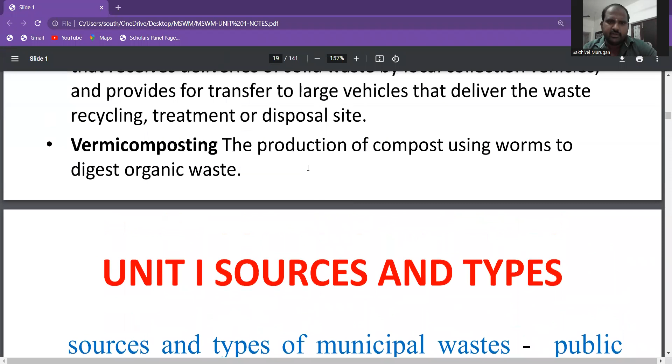So, we are going to see a topic in the subject of municipal solid waste management in the final subject. So, first of all, we are going to take a topic in unit one. That is called the sources and the types of solid waste. Okay. So, what are the sources and the types of municipal waste?

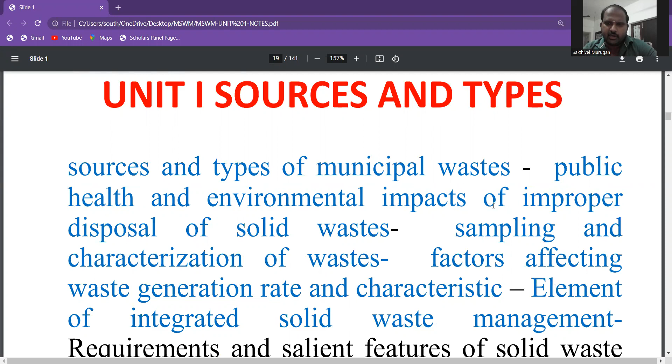So, first of all, sources and the types of municipal waste, and then public health and environmental impacts of improper disposal of solid waste. In that, a lot of sampling techniques and characterization of waste is there. Then factors affecting waste generation rate and characteristics. Next one is the elements of integrated solid waste management and what is integrated solid waste management.

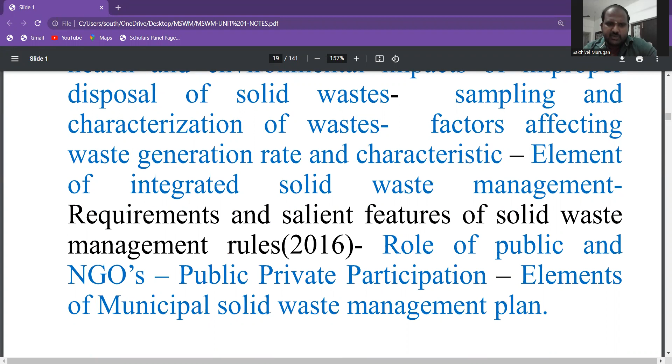We are going to see a topic of requirements and salient features of the solid waste management rules of 2016. Next one is the role of public and NGO, public private participation, elements of municipal solid waste management plan. So lot of topics in the first unit. One by one we are going to see about that.

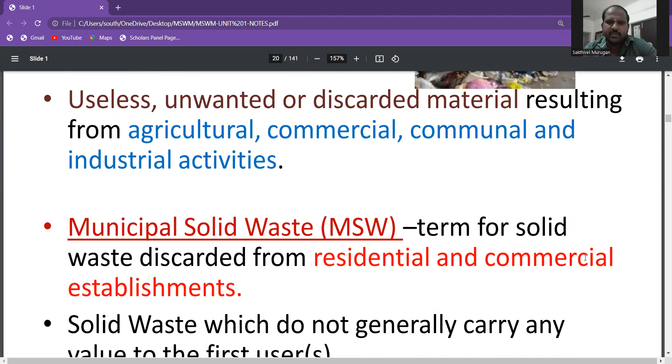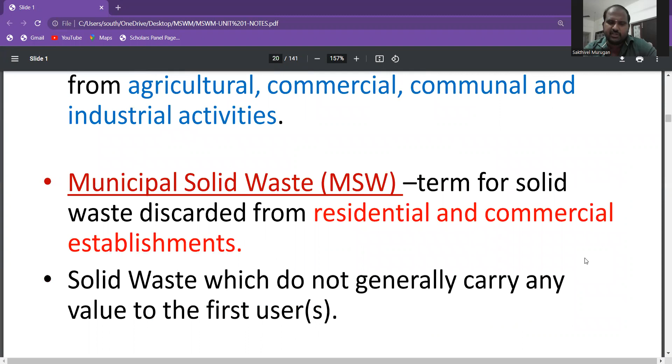So first of all, what is waste? Waste is a useless, unwanted, discarded material resulting from agricultural, commercial, communal and industrial activities. Next one is municipal solid waste, that is MSW, term for solid waste discarded from residential and commercial establishments. Solid waste does not generally carry any value to the first user.

So we are going to see a topic of classification of solid waste. What is the classification of solid waste? A lot of waste comes under the topic, which is classified into various types. Solid wastes are classified on the basis of source of generation and type. First, we are going to see source based classification. What is meant by source based classification?

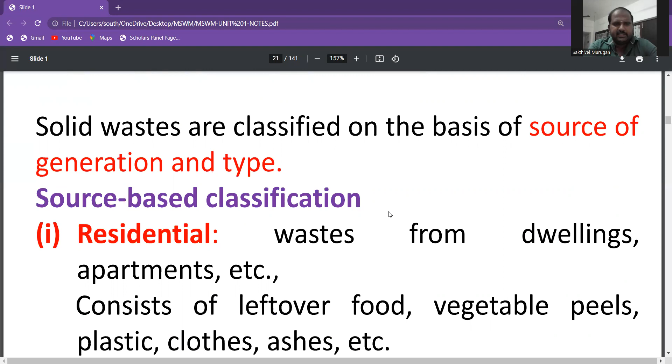Next one is commercial waste. Commercial waste consists of leftover food, glasses, metals, ashes, etc. It is generated from stores, restaurants, markets, hotels, motels, auto-repair shops, medical facilities, etc. So first one is residential. Next one is commercial.

The third one is institutional. What is institutional waste? This mainly consists of paper, plastic, glasses, etc., generated from educational, administrative, and public buildings such as schools, colleges, offices, prisons, etc.

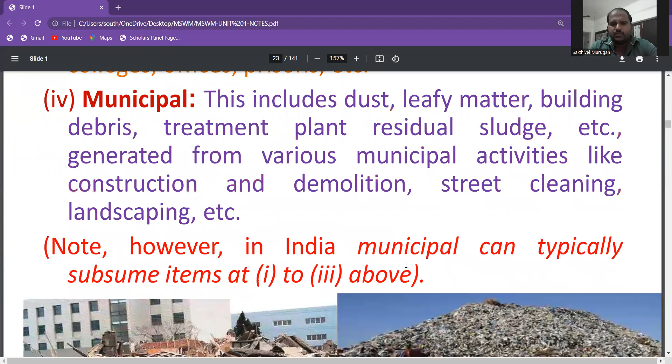The fourth one is municipal. This includes dust, leafy matter, building debris, treatment plant residual sludge, etc., generated from various municipal activities like construction and demolition, street cleaning, landscaping, etc. These are some pictures of municipal waste.

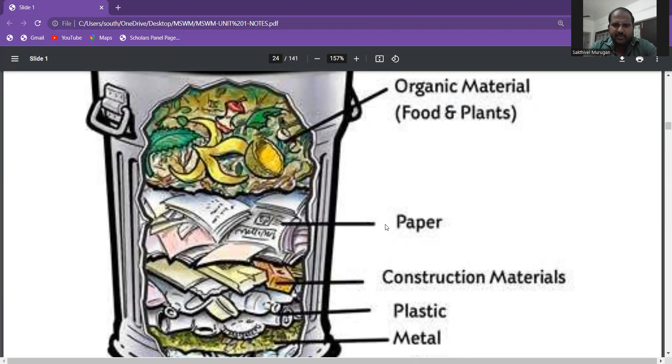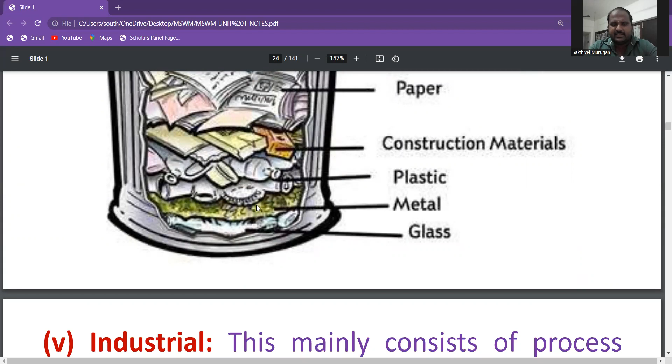Next, what does this diagram consist of? It is about composting of wastes. First, organic material like food and plants composts. Next, paper waste is another speedy composting one, third is construction material, fourth is plastic, and at most metal and glasses take billions of years to decompose.

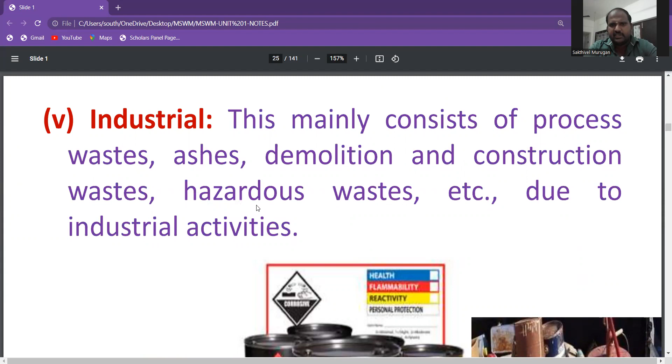The next one is industrial. This mainly consists of process wastes, demolition and construction wastes, hazardous wastes, etc., due to industrial activities. These are some examples of industrial wastes. Next one is agriculture. Agricultural waste mainly consists of spoiled food grains and vegetables, agricultural remains, litter, etc., generated from orchards, vineyards, farms, etc.

Next one is open area. We already see this in a daily manner. Some municipality members do daily cleaning in our street. Open areas include waste from streets, alleys, parks, vacant lots, playgrounds, beaches, highways, and recreational areas.

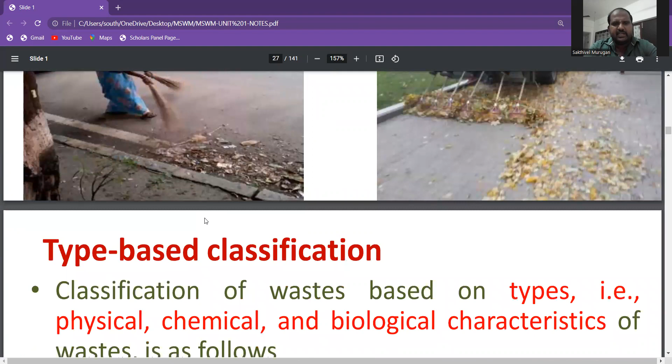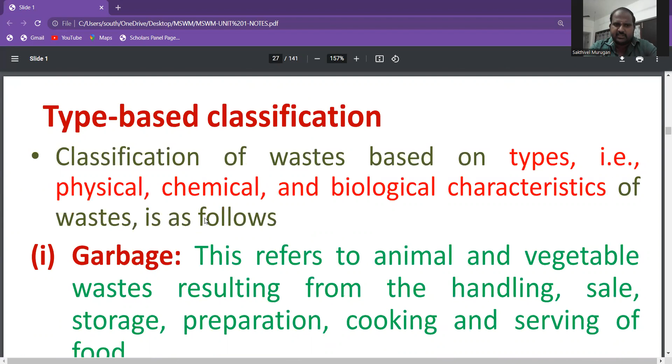So the first one is source based classification, and next one is type based classification. What is meant by type based classification? Classification of waste based on types; it comprises physical, chemical, and biological character of the wastes as follows. First one is garbage. What is meant by garbage? We already know that garbage is waste material.

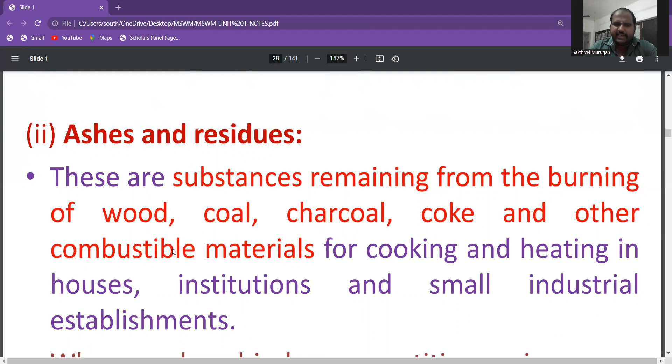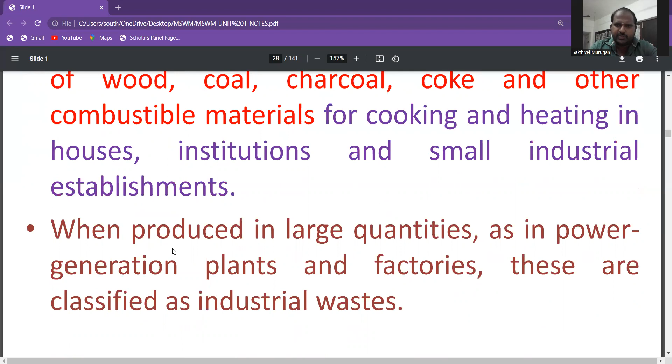So next one is ashes and residues. So what is ash waste? These are substances remaining from the burning of wood, coal, charcoal, coke, and other combustible materials for cooking and heating in houses, institutions and small industrial establishments. When produced in large quantities, as in power generation plants and factories, these are classified as industrial wastes.

So next one is combustible and non-combustible wastes. So what is meant by combustible waste? These consist of waste generated from households, institutions, commercial activities, etc., excluding food wastes and other putrescible materials. Typically, combustible material consists of paper, cardboard, textile, rubber, garden trimmings, etc. Non-combustible material consists of glass and crockery, tin, aluminum cans, ferrous and non-ferrous materials, and also dirt.

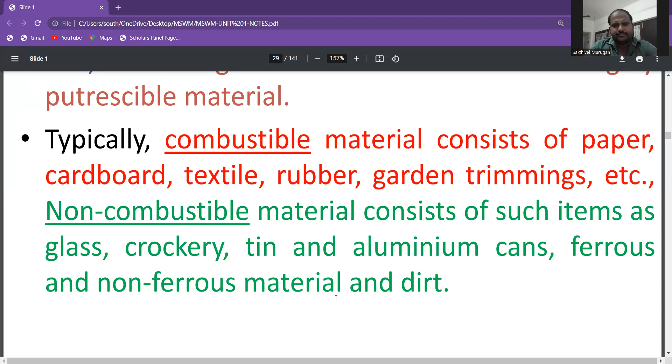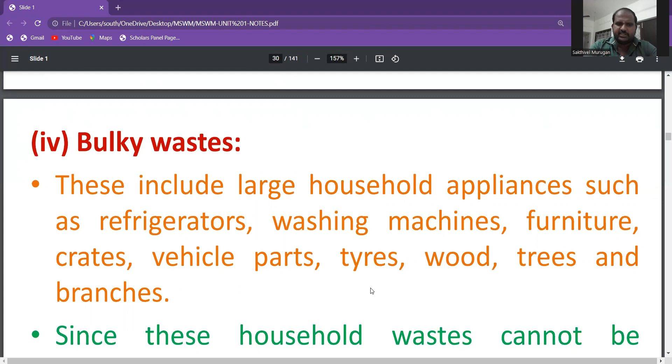So next one is bulky waste. It is one of the type-based classifications. Bulky wastes include large household appliances such as refrigerators, washing machines, furniture, crates, vehicle parts, tires, wood, trees, and branches. Since these household wastes cannot be accumulated in normal storage containers, they require a special collection mechanism. So these are some bulky wastes among household products. Every family has some of these kinds of household products as waste.

So next one is street waste. What is street waste? Waste that is collected from streets, walkways, alleys, parks, and vacant lots, and includes paper, cardboard, plastic, dirt, leaves, and other vegetable matter. So next one is biodegradable and non-biodegradable waste. It is one of the very important wastes we are handling.

So first of all, what is meant by biodegradable? Leftover food, vegetable and fruit peels, paper, textile, wood, etc. These are biodegradable waste. It comes from household and industrial activities. And next one is non-biodegradable waste. Non-biodegradable waste is nothing but inorganic and recyclable material such as plastic, glass, cans, metals, etc. So this is a table of biodegradable and non-biodegradable waste degradation time.

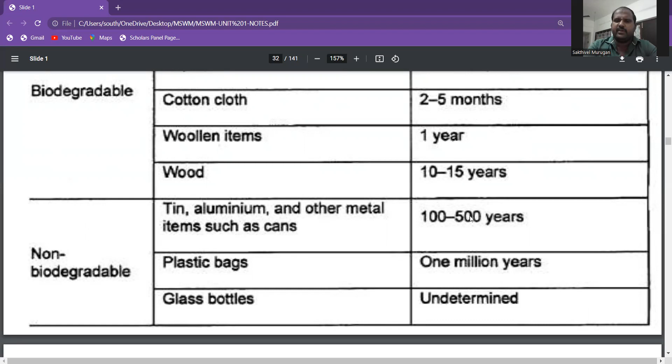So next one is plastic bags. We know that the government should not allow one-time plastic bags. What is the reason? Single-use plastic bags take 1 million years to degrade. That's why the government should take action on it. So next one is glass bottles. Plastic bags take a very long time to decompose, but for glass bottles it is not determined. So it is undetermined.

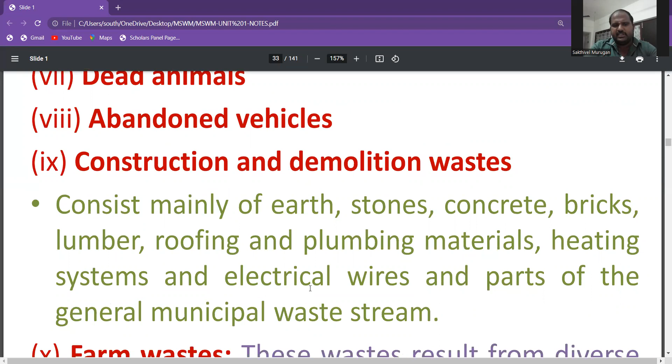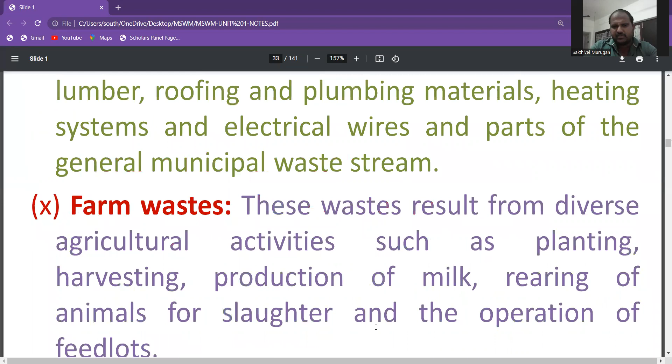So next one is dead animals. Next one is abandoned vehicles, construction and demolition waste. It consists mainly of earth, stones, concrete, bricks, lumber, roofing and plumbing materials, heating systems, electrical wires, parts of the general municipal waste stream. So next one is farm wastes. These wastes result from diverse agricultural activities such as planting, harvesting, production of milk, rearing of animals for slaughter, and the operation of feedlots.

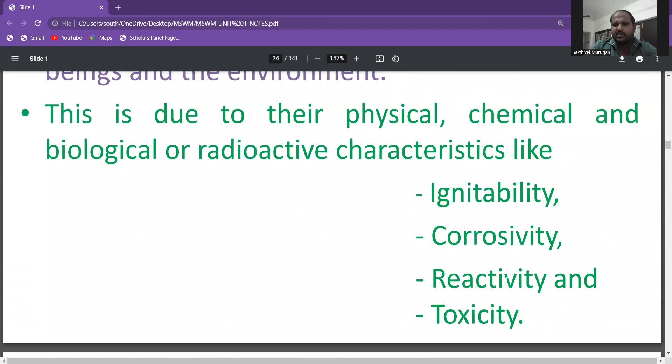And next one is hazardous waste. Hazardous waste is defined as wastes of industrial, institutional, or consumer origin. They are potentially dangerous, either immediately or over a period of time, to human beings and the environment. This is due to their physical, chemical, biological, or radioactive characteristics like ignitability, corrosivity, reactivity, and toxicity. These are the most important dangerous characteristics of wastes. When we handle waste in an open way, we have to consider these kinds of parameters.

So the next one is typical examples of hazardous wastes are empty containers of solvents, paints, and pesticides, which are frequently mixed with the municipal waste and become part of the urban waste stream. Certain hazardous wastes may cause explosions in incinerators and fires at landfill sites. Others, such as pathological waste from hospitals and radioactive waste, also require special handling.

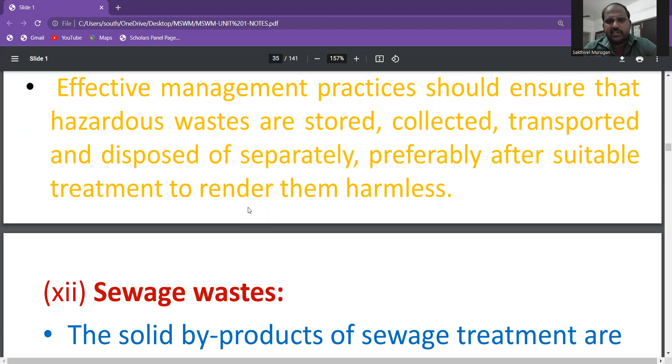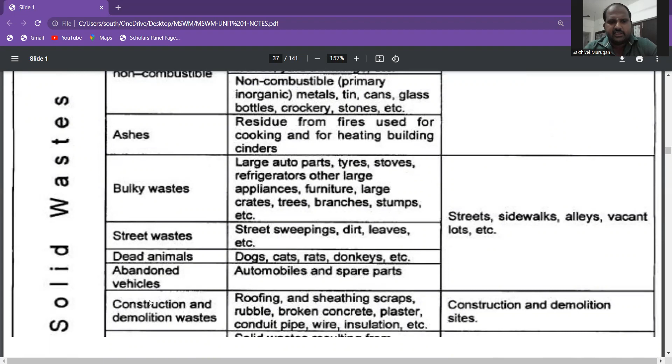Effective management practice should ensure hazardous wastes are stored, collected, transported and disposed of separately, preferably after suitable treatment to render them harmless. Sewage wastes: the solid byproducts of sewage treatment are classified as sewage waste. So these are some source-based classifications: garbage, combustible and non-combustible. We have already seen bulky waste, street waste, dead animals, abandoned vehicles, construction and demolition wastes. And industrial wastes come from factories and power plants.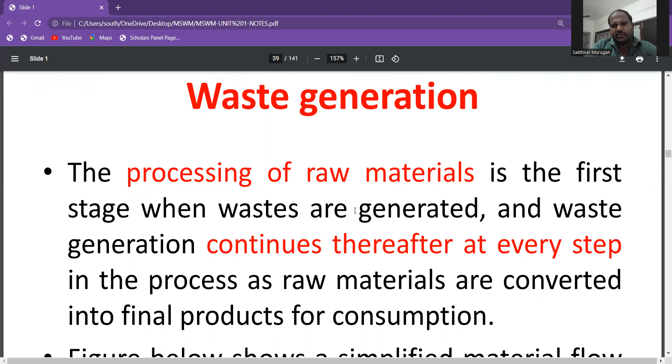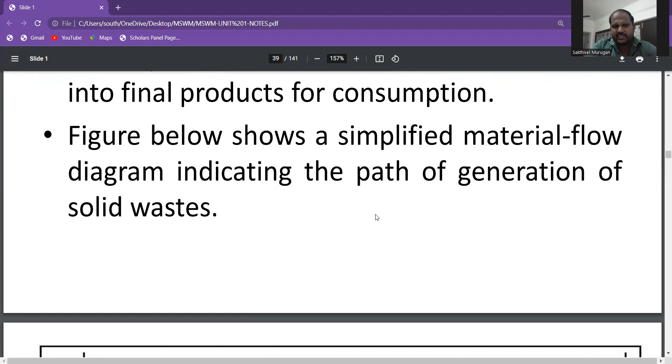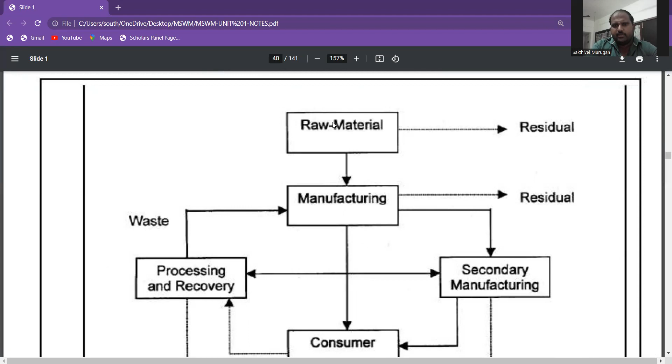So the next one is waste generation: how waste accumulates and where it comes from. This is called waste generation. Processing of raw material is the first stage when waste is generated, and waste generation continues thereafter at every step in the process as raw materials are converted into final products for consumption. The sample figure shows a simplified material flow diagram indicating the path of generation of solid waste. First of all, waste comes from manufacturing of raw material: raw material, manufacturing, consumer, final disposal.

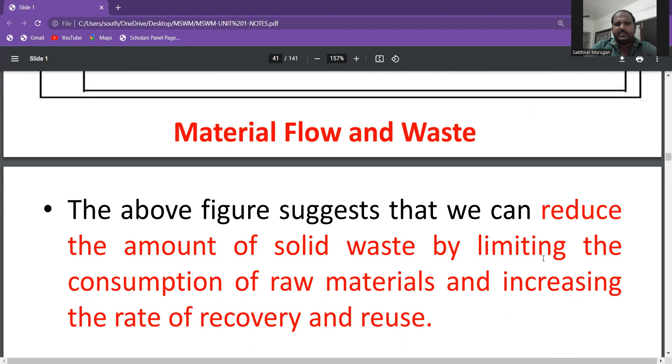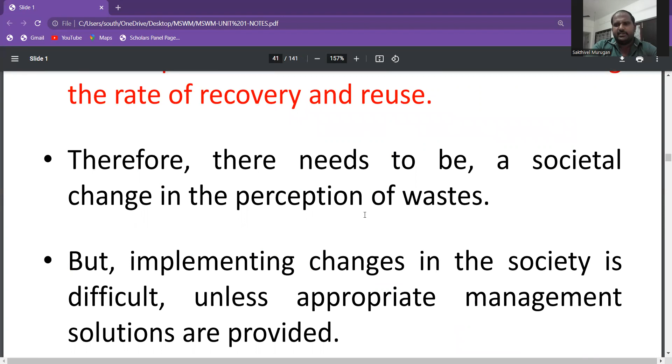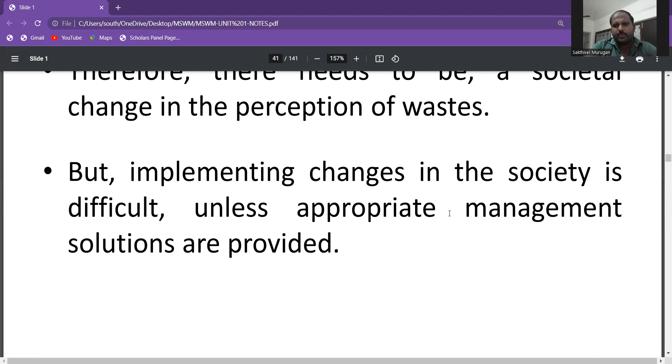So the above figure suggests that we can reduce the amount of solid waste by limiting the consumption of raw material and increasing the rate of recovery and reuse. There needs to be a societal change in the perception of wastes, but implementing changes in society is difficult unless appropriate management solutions are provided. Methods of estimation of future per capita generation.

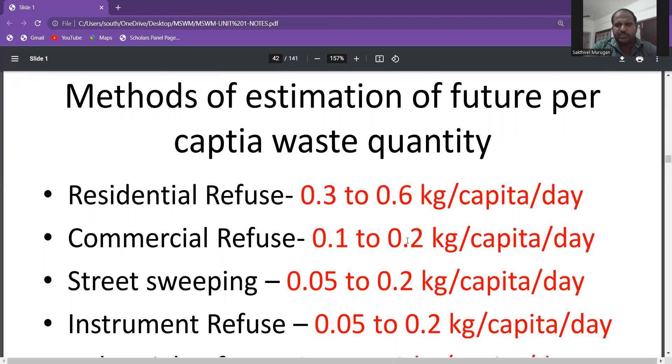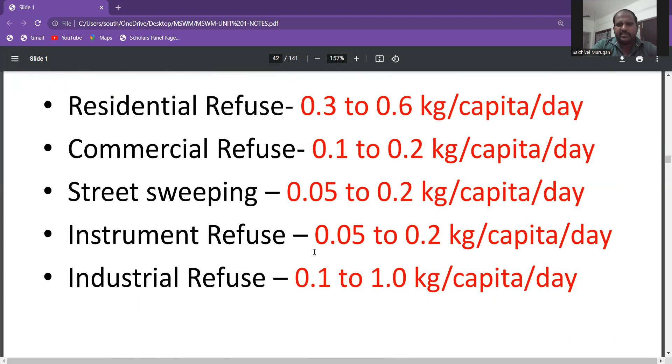So residential refuse is 0.3 to 0.6 kg per capita per day. Commercial refuse is 0.1 to 0.2 kg per capita per day. Street sweeping is 0.05 to 0.2 kg per capita per day. Institutional refuse is 0.05 to 0.2 kg per capita per day. Industrial refuse is 0.1 to 1.0 kg per capita per day.

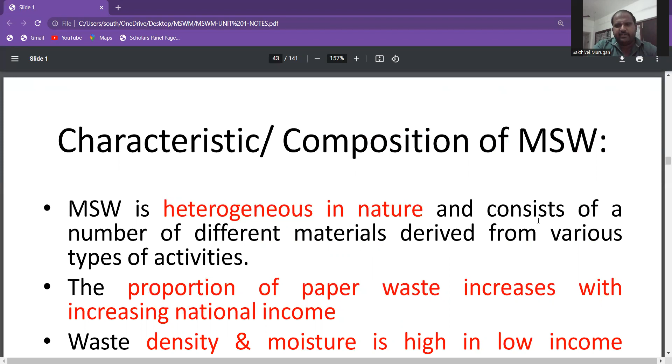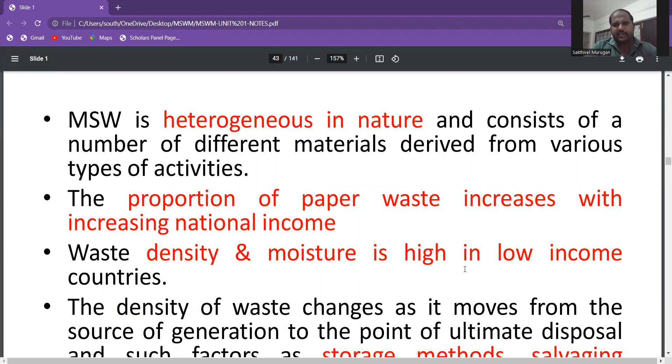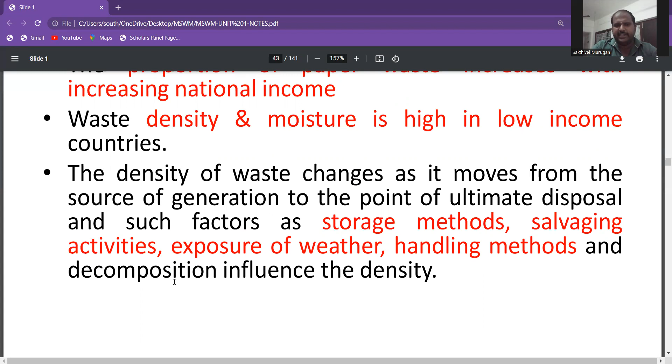So next one is the characteristics and composition of municipal waste. MSW, municipal solid waste, is heterogeneous in nature, consisting of a number of different materials derived from various types of activities. The proportion of paper waste increases with increasing national income. Waste density and moisture are high in low income countries. The density of waste changes as it moves from the source of generation to the point of ultimate disposal, and factors such as storage methods, salvaging activities, exposure to weather, handling methods, and decomposition influence the density.

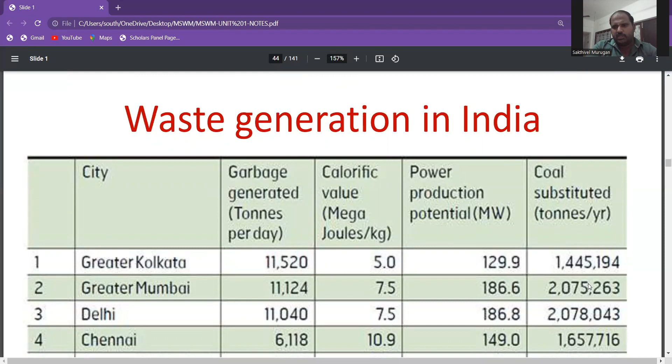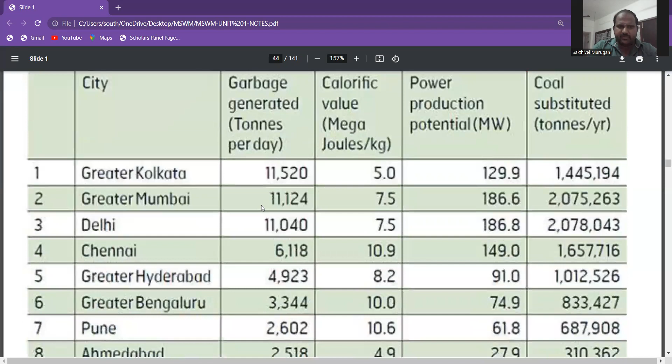So the table contains waste generation in India. First one is Greater Kolkata. Garbage generated is 11,520 tons per day. Calorific value is 5.0, power production potential 129.9, coal substituted per year is 1445194. So these are some sample waste generation figures per day across India.

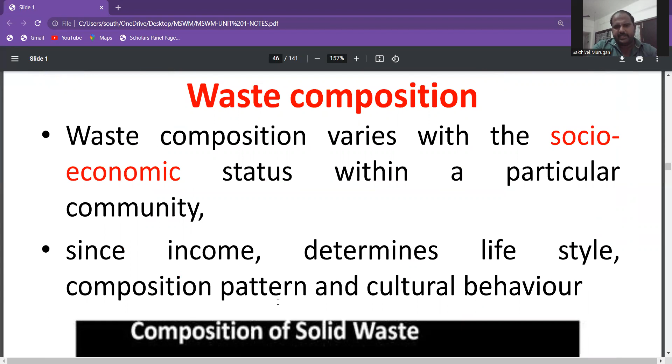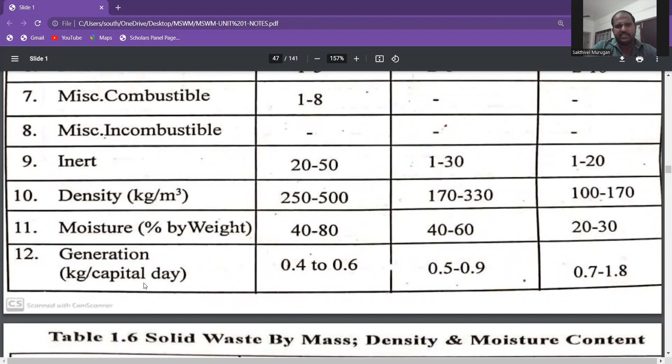So waste composition. What is waste composition? Waste composition varies with socio-economic status within a particular community, since income determines the lifestyle, consumption pattern, and cultural behavior. So this one is biodegradable waste, paper waste, plastic, rubber, metal, glass, inerts, earth, domestic hazardous. These are the composition characteristics and quantities: metals, glass, ceramics, food and garden wastes, paper, textile, plastic, rubber, miscellaneous combustible, incombustible, inert material, moisture content, density, generation per capita per day.

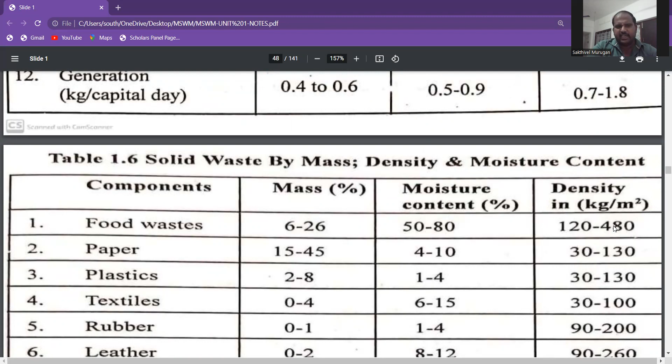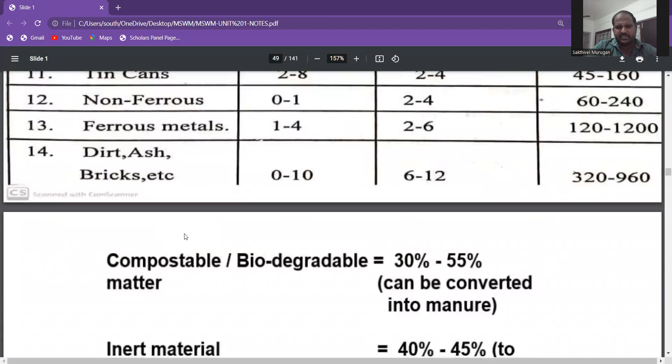So the components of waste. Food waste has a mass of 6 to 26%. It contains a moisture content of 50 to 80%, and a density of 120 to 480 kilograms. Then paper wastes, plastic wastes, textile, rubber, leather, garden trimmings, wood, organic substances, glass, tin cans, non-ferrous metals, ferrous metal, dirt such as bricks, etc. These are some formulas of generating waste.

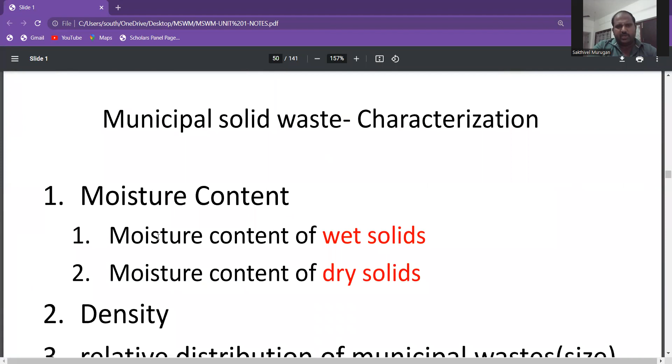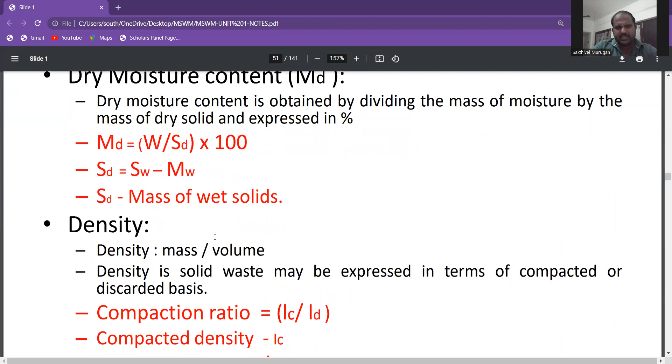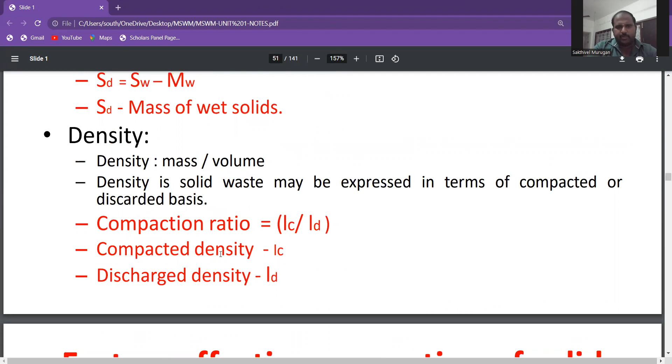So next one is municipal solid waste characteristics. First of all, moisture content: moisture content of wet solids, moisture content of dry solids. These are all contained in the physical characteristics. Next is moisture, density, relative distribution of municipal waste sizes, etc. Wet moisture content, dry moisture content; these are some calculations of moisture content. Next is density, how the density is calculated. Then compaction ratio, compacted density, discharge density.

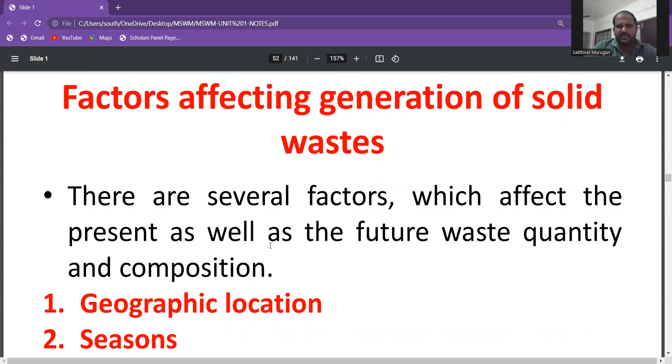Factors affecting generation of solid wastes. There are several factors which affect the present as well as the future waste quantity and composition: geographic location, seasons, collection frequency, population diversity, public attitude, legislation. So these are the several factors which affect the quantity of waste and composition. So these are the first unit topics.